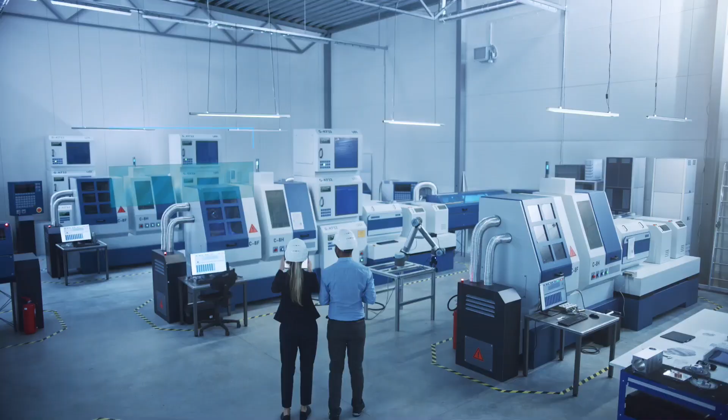Welcome to the presentation about the overview of our VDMA's OPC UA activities. My name is Andreas Faath, and I'm leading the department Machine Information Interoperability. And this is exactly what it is about today: the machines, their information, and how to provide this information in an interoperable way.

I will shortly go into the VDMA, then explain why interoperability is so important for digital transformation at all. Then I will go a little bit into the OPC UA Companion Specification work we do inside the VDMA with a lot of member companies, but also companies and users worldwide. After this, I'll shortly dive into the UMATI initiative for just an insight, because this will be shared in one of the next upcoming sessions anyway.

The VDMA, as most of you know, is the most important industrial association in Europe. We cover about 3,600 member companies from the engineering industry, and we are structured in different trade associations covering the specific needs of the different areas, like plastic and rubber machinery, robotics, measurement systems, power systems, agricultural machines, and so on.

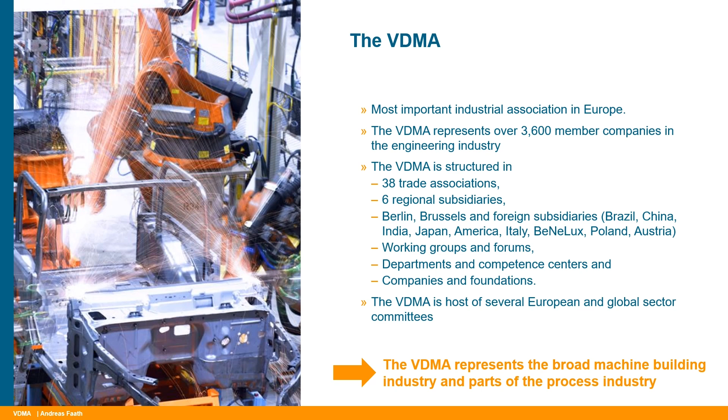So the most important thing is that everything I tell you in this presentation covers information and activities regarding the whole machinery industry, as the VDMA acts as an umbrella association for the different domains. And with this, we also have the position that mechanical engineering is, as we believe, the center of the whole production life cycle.

Also for end customer products, machines from the mechanical engineering industry are critically important, as they are the assets in the production used to produce almost everything we know from our professional and daily life. So with this, we really have the heart chamber of innovation, and also the term, for example, Industry 4.0.

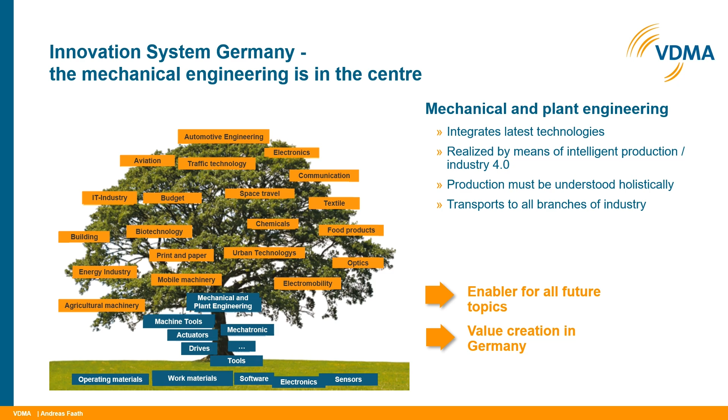If we go to the point of Industry 4.0, most of you should know the government-driven platform Industry 4.0, and they have a vision for 2030. What we see here is the point of autonomy, sustainability, and interoperability.

For the area of interoperability, it is of course about information data, but also about regulatory frameworks, and for example, stuff like artificial intelligence, because everything is based on information that has to be provided in an interoperable way to scale and to use the full potential of the different technologies and concepts.

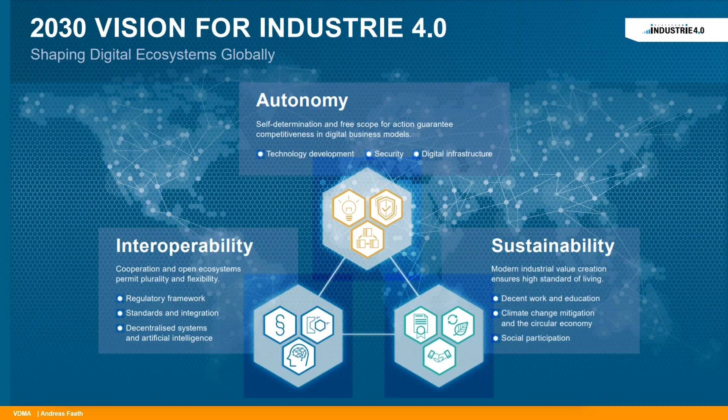So what is our goal? I guess this is what you all are doing some way: we are looking for a smart production of the future. So the topic of digital market platforms, customer specific but still mass production, the integration of machines, products, and systems in internet technologies with plug and work and stuff like this is all on our minds.

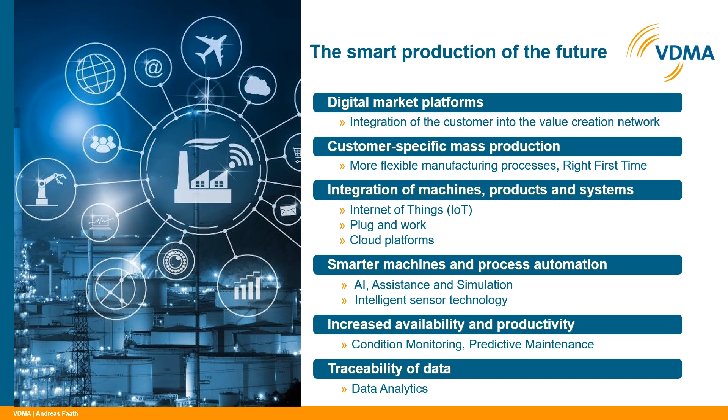A lot of this is already achieved. Where we are still looking is what role information is having in our daily work. We believe, and also a lot of others of course do, that today and also in future, data and information are the most important resource.

What does that mean? This is more than just data availability, because data availability of our own data today is not the problem. Also, the storage of this information in an efficient way is something mostly solved. But the way to use external information, to have an efficient data transfer and data transparency, to be able to compare data and information without an inefficient interpretation of all the information - this is really something we have to work on.

This is where often mistakes and problems occur, because, for example, we also don't have an error-proof data interpretation in our daily work. So the processing of the information and the scalability of our algorithms, applications, concepts, and so on is not taking the full potential, because we still don't have these really information-driven business models and the efficient realization of the information-related regulations coming up, because data is hard to use when it is not standardized, when it is not available in the same way along the whole value chain, and is still proprietary defined.

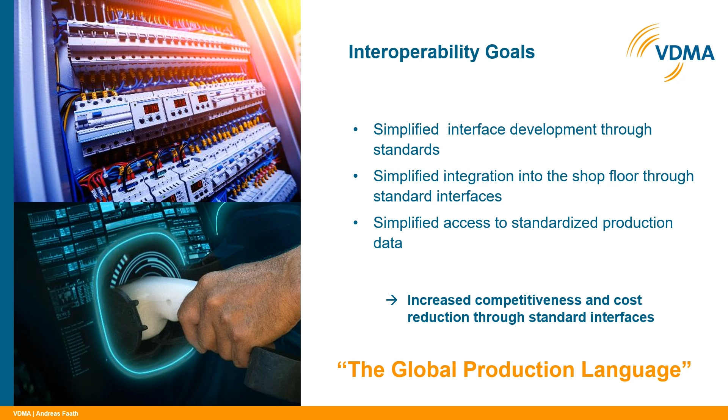So we believe the competitiveness is increasing and costs are reduced by the use of standardized interfaces for shop floor information. What is needed is a global production language.

And this global production language is based on a standardized vocabulary. So in the opposite way, like we have in the Babylonian clamor, where nobody was able to understand each other, we want to have a standardized vocabulary.

And this standardized vocabulary really has to be hard and clear, because a machine is not able to understand that hello and hi may be the same meaning. It really has to be 100% exactly the same. So this is why we have to define technical standards.

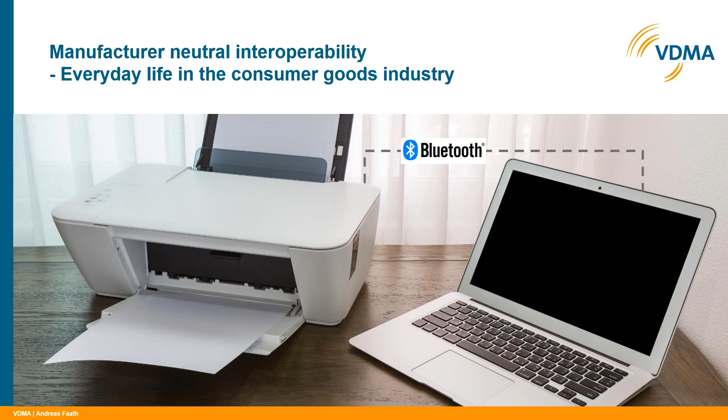And those technical standards, or kind of them, you all know. Because if you're connecting your laptop to a printing device or your mobile phone to your car, you know all about the Bluetooth standard. So with this Bluetooth standard, you are able to get a connection between two devices that never were connected before, and you don't have to read anything.

Like handbooks or something where it is explained what is meant by the different interface information. So you just connect to Bluetooth and you just connect to the next asset that you want to, that is also having Bluetooth. Why is the function then also working?

This is because inside the Bluetooth community, there were groups defining the standardized information that is exchanged for the different functions, jobs, and information transfer between the different use cases, for example audio, telephony, and automotive. So this is the same thing we have in the future and also today in some parts in the industry.

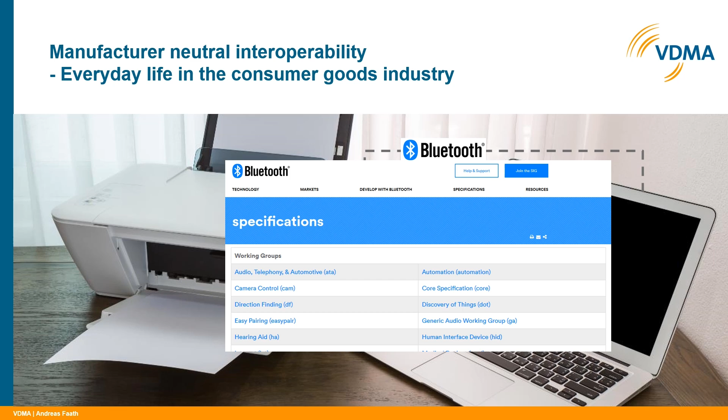But of course, we are not using Bluetooth, we are using something else. And this something else is OPC UA. The OPC UA standard, it's an IEC standard 62541, is an open source architecture. It has security by design included. It supports various protocols, it has a semantic machine description available, and it's scalable. It scales from just one node to one million nodes, from the shop floor up to the cloud, in a vertical and also horizontal network.

So with OPC UA as our industry-driven, comparable Bluetooth connection possibility, we have from the manufacturing industry the possibility to really reduce development of interfaces, have easier integration, and better, clearer usage of information.

So OPC UA stands for Open Platform Communications Unified Architecture. And at first, it's protocol independent. So it's not bound to, for example, MQTT or HTTPS. Of course, MQTT is part of OPC UA. So you can use OPC UA with MQTT inside.

So the question, do we use OPC UA and MQTT, is not the question. The question is, do I want to have the benefits from OPC UA, like security by design and the possibility of companion specifications, the domain-specific information models, or do I just want to have MQTT possibilities and features.

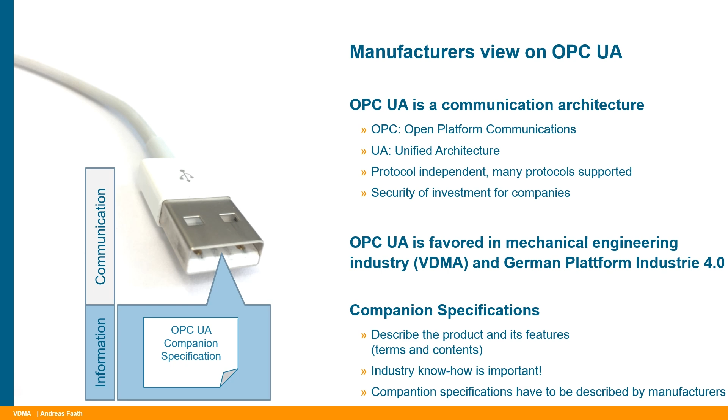So with this, I want to go one point deeper into OPC UA technology. OPC UA technology has exactly two areas: transport, including protocols, rules, rights management, security and stuff like this. And then we have the information layer, where the standardized information, the content, is defined and can be standardized.

For the transport area, we have the possibility of client-server communication, publish and subscribe communication, and of course the underlying protocols. For the information layer, we have two basis areas developed by the OPC Foundation, the global association covering development of the OPC UA technology, and then we have the OPC UA companion specifications developed and hosted by the VDMA and its partners.

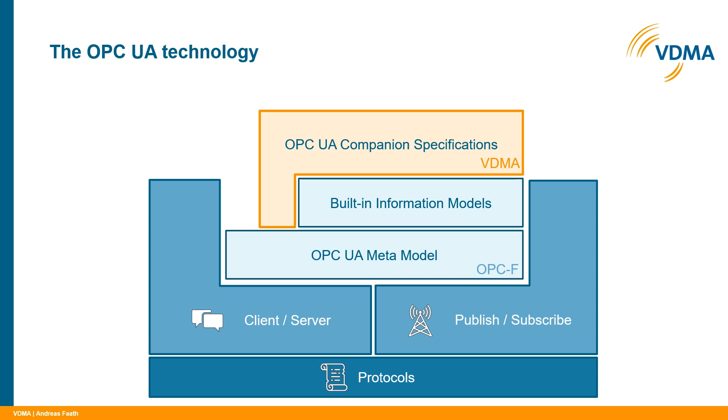If we would stop there, there would be no chance that companies could put in their not just pre-competitive relevant information into the technology, into the interface, because they want to have their specific information that is not shared in our working groups to the standards, to the interfaces. So we have vendor-specific extensions in OPC UA.

In the vendor-specific extension, every company, after implementing the OPC UA connection and the OPC UA companion specification, can add their individual information to the interface. So the question of whether machines become easily replaceable or pushed out of the market by competitors is not the case, because vendor-specific information, interfaces and value can still be put into the OPC UA interface, even if there is also an OPC UA Companion Specification that serves as the basis of the interface.

To understand what OPC UA Companion Specifications really can do, and why they are so good and easy to use for the industry, I would love to explain the two kinds of OPC UA Companion Specifications we have in the mechanical engineering industry.

At first, we have the domain-specific harmonized information models. This means that for the different domains, the domain-specific information is taken from the domain experts and standardized in these specs. So information like identification or job management, which is not specific to a domain, will not be covered here because it's cross-domain relevant.

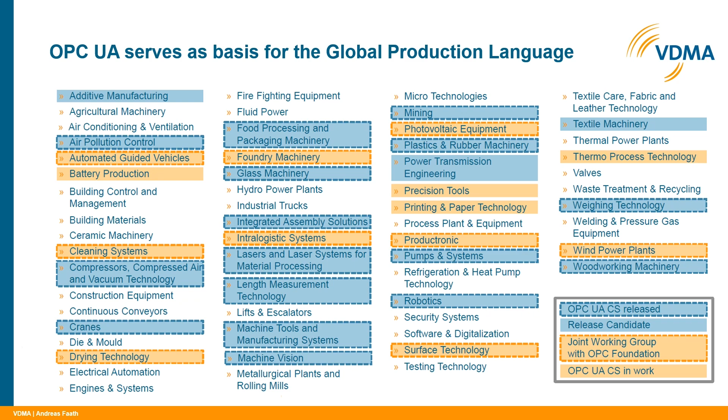Stuff like in the robot area, an axis rotational speed, or in weighing technology, some scale values, is domain specific, so it is covered here. This gives us the chance to go to the highest level of interoperability with our cross-domain harmonized information models, which we call OPC UA for machinery.

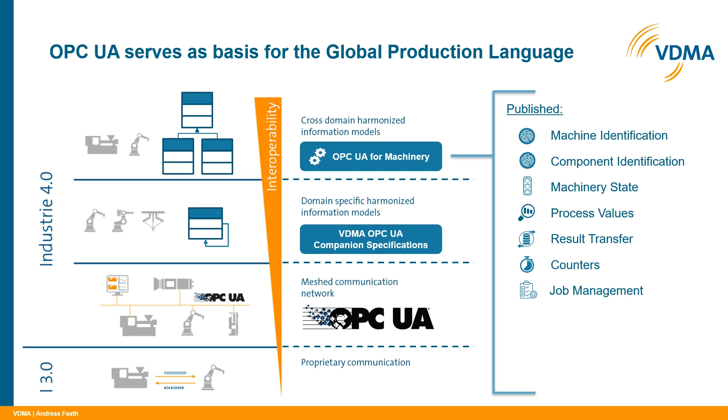In OPC UA for machinery, which will also be a deep dive in one of the next sessions, we have the possibility to cover exactly the cross-domain relevant information. This is something like machine or component identification, states of machines, process values, result transfer information, counters, or job management, which was recently released. Upcoming and in work are, for example, the topics of basic server structure and energy management.

So if we go from bottom to top, we have different levels of interoperability. In the old world, we had proprietary communication with no standardized information and no standardized connection or communication. Second, we have the standardized meshed communication network by the OPC UA technology. Next level, domain-specific information standardized. And on the last level, we have, in addition, the cross-domain information standardized.

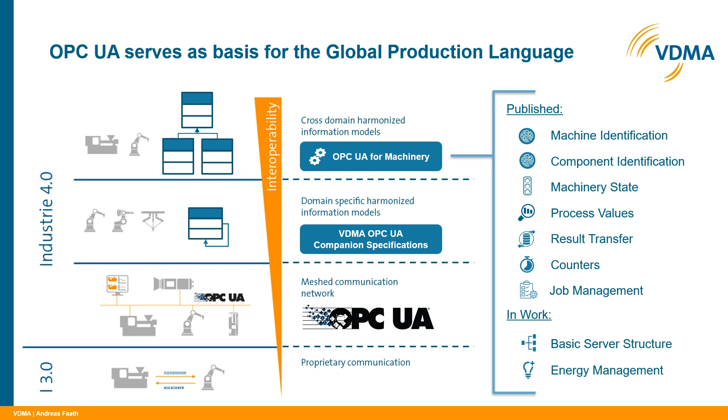So really, a bunch of information is already standardized by the groups and can be used in the industry, because it's also open source and freely available, and already used in several products now. The OPC UA for machinery, to go into it just a little bit, is for the whole mechanical engineering industry, and it is based on building blocks.

So if a machine has an identification, you can implement the identification building block. All machines have an identification, because this is kind of a basic building block everybody should use. But for example, a state machine, maybe not everybody has, so if you don't have it, you could leave it out.

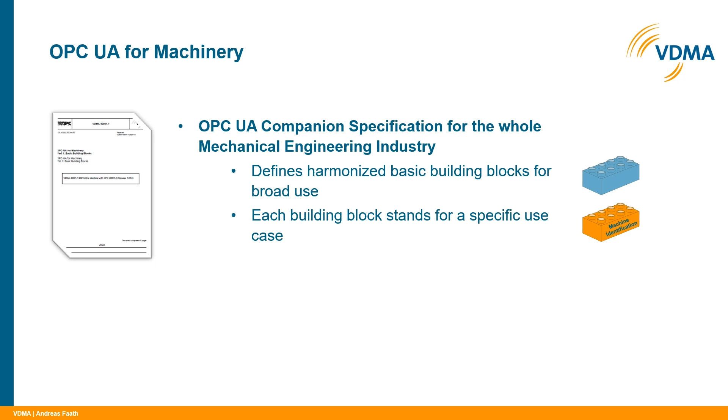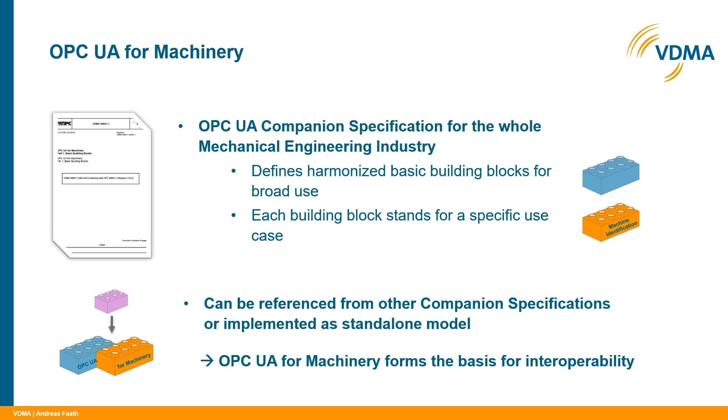And so it's highly flexible and it can be referenced from all the other companion specifications, or also be implemented as a standalone model. So the OPC UA for machinery is the basis spec for the whole industry. And if we look at how this is used, normally there is first the implementation of OPC UA for machinery, and after it there can be the use of a domain-specific information model. If there is just one, it perfectly fits.

If there is, like at the machine tool area, one specification for machine tools, and this also has a second specification with more specialized information, for example lathe machines, there could also be three specifications used together. But as mentioned, OPC UA for machinery as a standalone model can also be used for machines where we have no specification today, or where it's a specific machine where a group of competitors can't come together and define a standard.

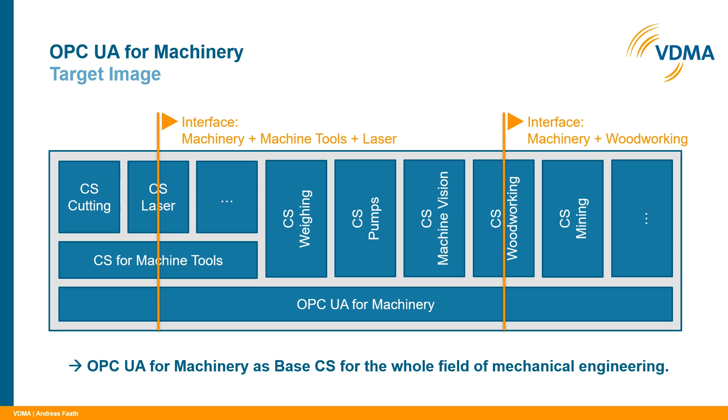So we have more than 60 actual published specifications. There are many more, but of course we did some versioning. So we have 60-plus specifications actually released, and they are open source available. And this is still not the end. There are coming even more specifications, like for battery production or wire harness manufacturing, to just name a few. So the mosaic of standardized production is getting clearer and fuller each day, each month, with each group that does a release.

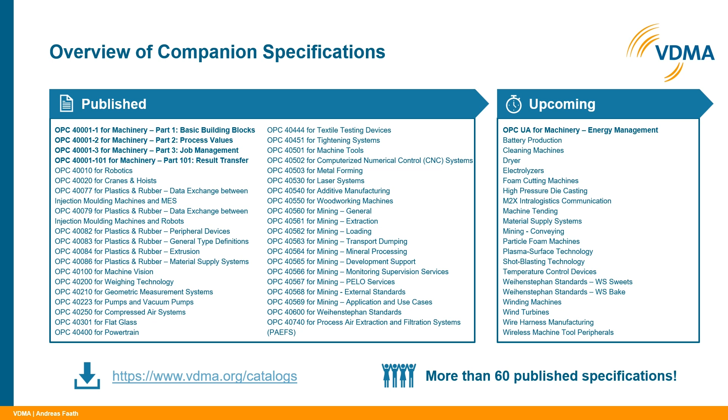The question that often occurs is, why do you do standardization on the shop floor side, on the machine side, with the domains? And the clear answer is, if use cases were defining their own information, we would lose the game if we look at it on a holistic level. Because then the machine manufacturer has to develop interfaces for different use cases, and we wouldn't win anything with that approach. So it's extremely important to have the information standardized at the single source of truth. And the single source of truth for information coming up in production is at the machine side, latest at the PLC.

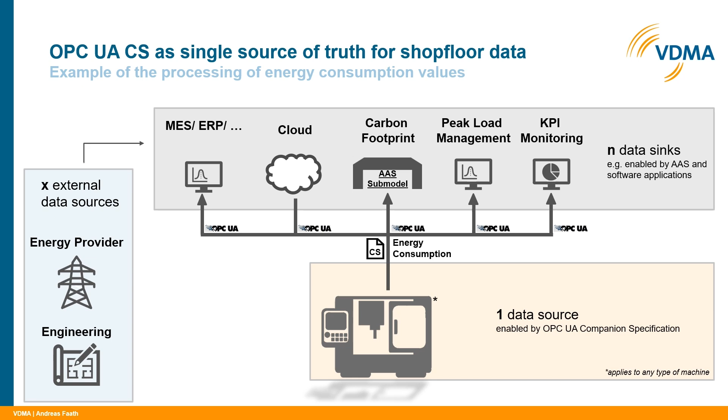So defining the information directly for the machines and then using this standardized information and semantics in all different kinds of use cases is extremely important, because then the use cases can use the same source, and also the use cases are interoperable regarding their semantics of the information from the production between each other.

So how does the typical development of such an OPC UA companion specification look like? Well, we go from preliminary work, where we have to see if there is demand in the industry and see how we can involve different parties, up to the content work, where we talk about which machines and which kind of information should be in the standards. Then we put it into the OPC UA technology, serving us kind of a grammar. And then we do the publication and, of course, a proof of concept.

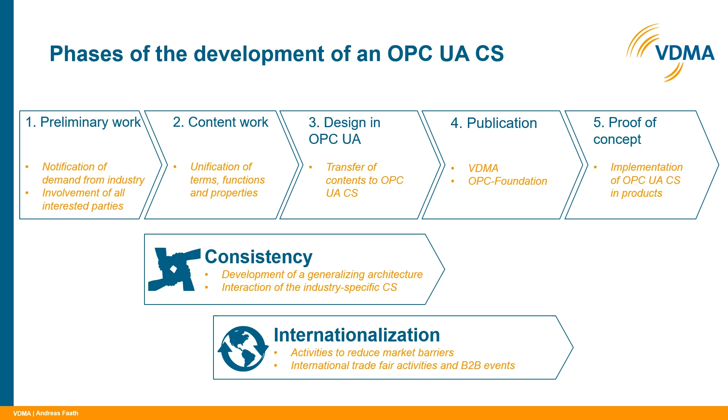During the content work and the OPC UA designing, there is a consistency check by the OPC UA for machinery usage, and also checking between different specifications to see if there is double work or work already done that we can use. And this is really done on an international, global level. We are not only showing the information at global events with our partners and at trade fairs, but we also have international partners like users, integrators, software companies, cloud providers, and machine builders in our groups.

So if we go for the preliminary work, we have as a first point, as an example from plasma surface technology, we have to do a kickoff. So in this kickoff, we are checking the requirements that we want to fulfill, that the industry has, and see if we can get some companies together to talk about whether they want to go further, or if there's maybe no importance in doing standardized interfaces in the domain.

Normally, there is high interest, so the groups are kicking off and starting there. The groups are mostly hosted by VDMA and in joint working groups with OPC Foundation, so we make sure that OPC UA experts from OPC Foundation can take part in the group, and also that our standards have a large reach and the possibility to integrate a lot of companies that maybe are not able to be a VDMA member, but still are relevant for the interface at all.

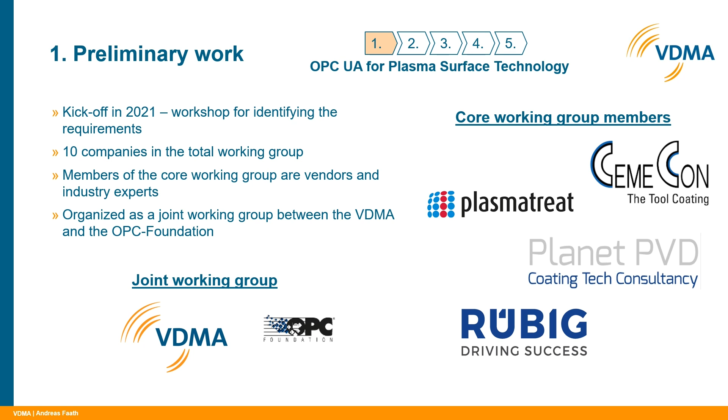Second step, we are defining the scope. The domain of plasma surface technology, as an example, has a lot of different machines and components, so which machines should be the most important part? Where should we start? Because we cannot standardize every machine at the same time. So at first we start, what machines should be mapped into OPC UA, and what manufacturing processes should take part of our OPC UA activities, and in which depth?

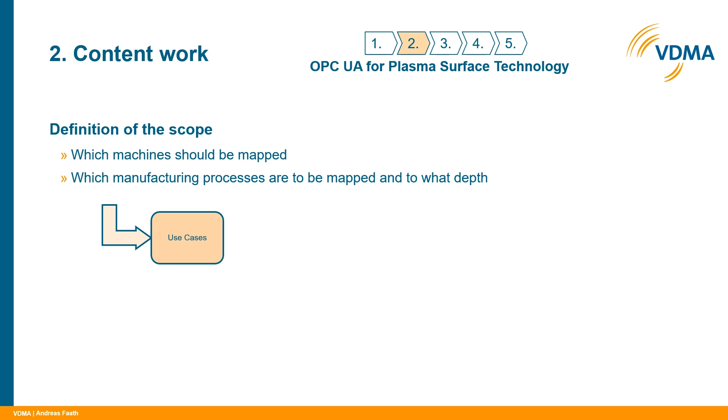And then we always start by use cases. We never just say, let's do 50 parameters that have no value. We start always by use cases. So use cases are defined, and then we have the different parameter lists. And in the parameter list, we have to decide which information is relevant for the defined use cases, which information is domain specific, and which information is so valuable that it's also important for other domains. This is what we put into OPC UA for machinery.

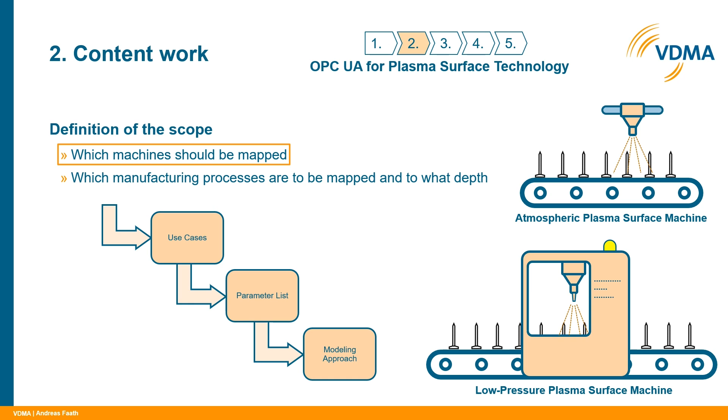And so we can define, for the different kinds of machines with different modeling approaches, the perfect OPC UA companion specification, by thinking about the later results already in the beginning of the content work, where we basically see which information is relevant for which machine and which use case.

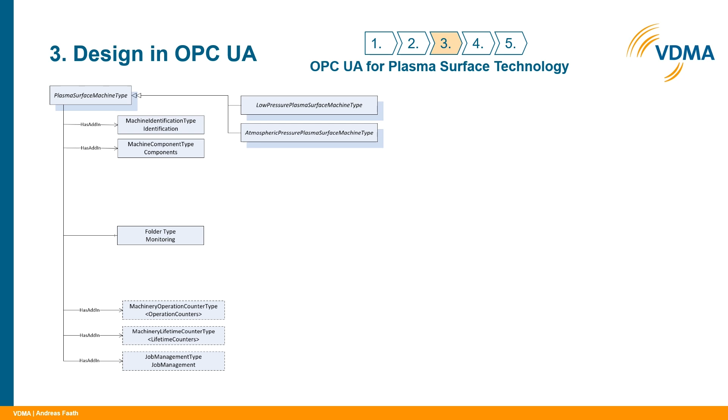The design in OPC UA, this is where the experts really come into play, and the domain experts step back a little bit because they already put their major knowledge into the group. This is where we put their knowledge into the OPC UA technology, let's say the grammar. Technology-wise, it is the information modeling.

So you see here an example, and I will, by purpose, not go into it, as it's still under development. But this is an example of how this information model can look like. Most importantly, it is not a flat list. We have the possibility to do classifications, to see dependencies, and also to have references or add-ins that can be used but don't have to. So it's also highly modular, and it gets more restricted by using the option to have mandatory and optional elements.

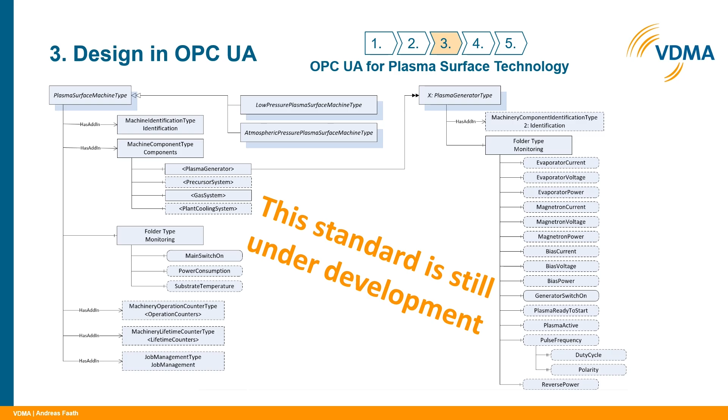For the depth of the different areas and their information models, all the other upcoming sessions are the perfect place to get informed about maybe not only your domain, but also other domains that might be familiar to yours, but also maybe totally different, to have a different viewpoint on this topic regarding OPC UA companion specifications and interface standardization.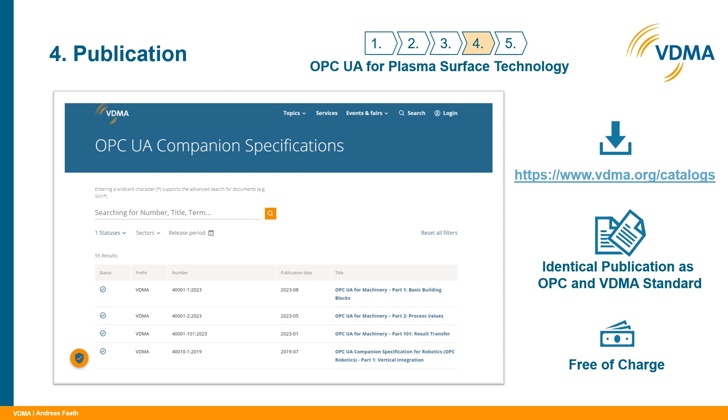And after the groups have defined the domain content and also the OPC UA companion specification, we are doing the publication. So at OPC Foundation side, there is the companion spec available. At VDMA side, the companion spec is available. It is free of charge. It is open source. Everybody can use it. And it's always a machine-readable XML file, but also a human-readable PDF to understand what exactly is done in the interface, how it should be implemented, and what is meant by the different OPC UA defined variables and structures.

And we are also going one step further. It's not only about having the standard on the market, everybody can use it. We really want to have the possibility to check if our specifications are easy to implement and to fulfill the use cases we found in the beginning in the content work.

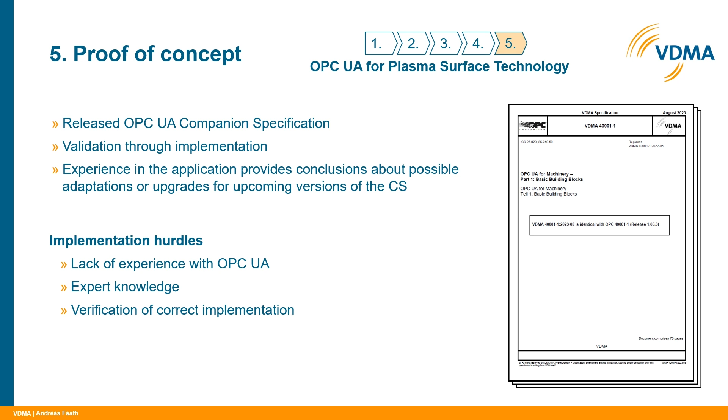There, the VDMA is stepping back, because we as an association take care of bringing together all the different kinds of machine builders and talking about standardization. But the usage in the industry is normally done by the machine builders and customers themselves. In this case, we sometimes have a lack of experience or expert knowledge with OPC UA, and we have to do verification of the correct implementation. This is done by an initiative we founded called UMATI, the Universal Machine Technology Interface.

This UMATI initiative steps in where the VDMA steps back a little, having a community that is together implementing OPC UA Companion Specifications of the machinery industry, so all the domain-specific stuff, but also the OPC UA for machinery.

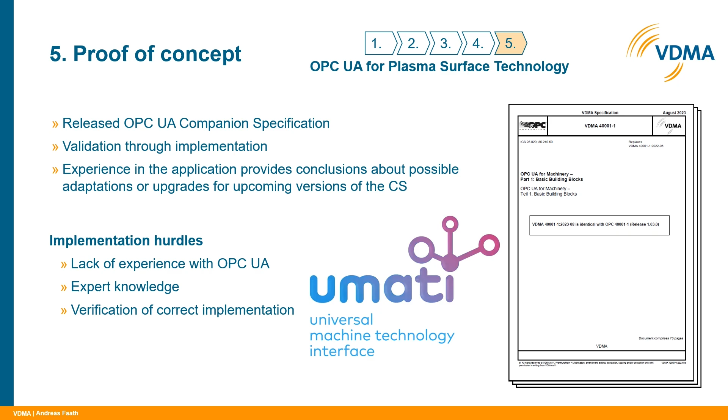The most important thing is that UMATI is open for every company, so there is no requirement on any membership. We really want the industry to have the possibility to get an exchange between machine builders and also users and software companies.

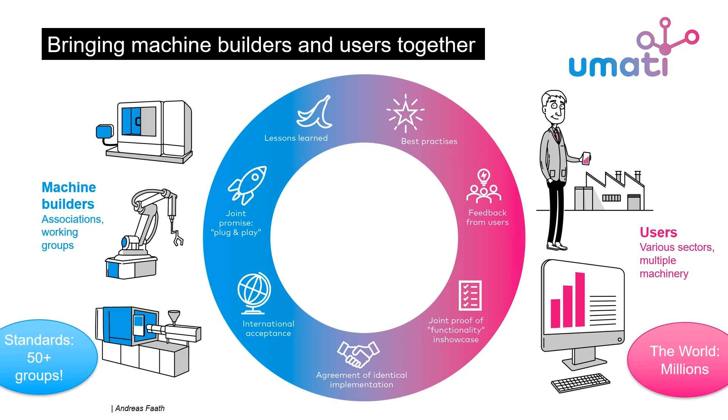And everybody who is somehow tackling the standards from the production. This community talks about lessons learned, best practices, but maybe most important is that they agree on an identical implementation and raise international acceptance. Everybody around the world, every company, can join this initiative and support the usage, doing first steps in the implementation of the OPC UA Companion Specifications, and also get feedback into the groups for their standardization work. This is taken up by a lot of companies, and we are still growing heavily.

Today we already have more than 350 partners worldwide, which is really a success, because adoption is also growing and has reached the point of no return regarding OPC UA technology, but also regarding OPC UA Companion Specifications.

Let me show you one of the different use cases that occurred in the last weeks and months. This is more driven by regulations. I think you have heard about the European Data Act. The European Data Act is really a fundamental legal reorganization of data access and data usage coming from the European Union, and this is really tackling all sectors everywhere in the whole European Union.

It should somehow support everybody - people, companies and individuals - to have a more balanced relationship between data access and their investment. So if you are a user of information, you have the right to get the information from the machine you are using. As a private person, maybe the information from your car that the car manufacturer can get from your automotive, but as a producer with a machine on the shop floor, also the information that is given from the machine to somewhere.